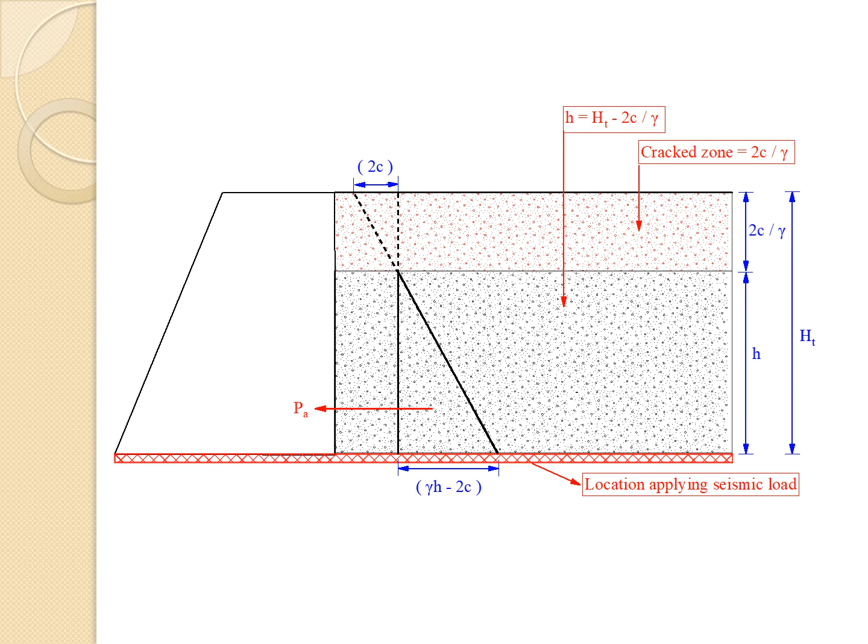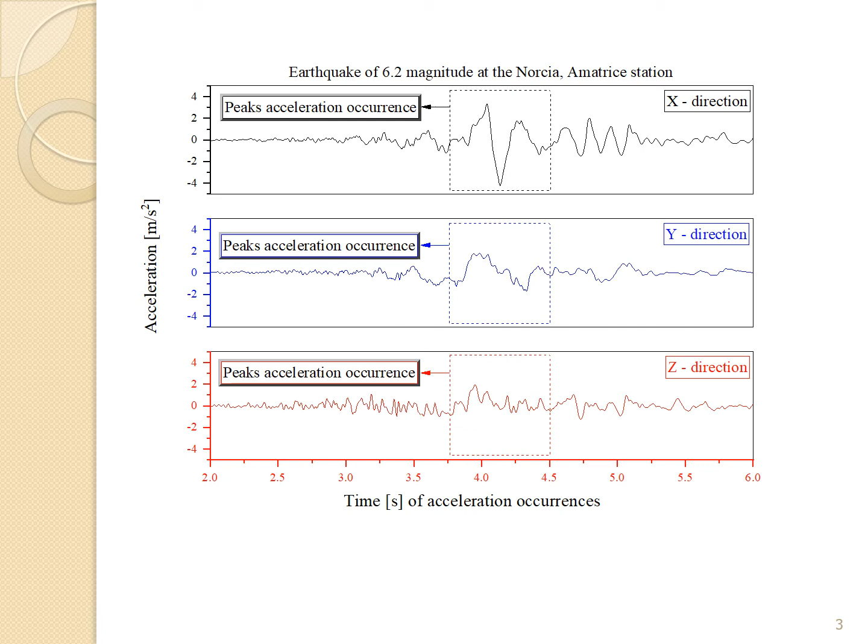The seismic load is applied here in X, Y, and Z directions simultaneously. Three important parts of the seismic load are selected based on peak acceleration occurrence. A magnitude 6.2 earthquake is used for this simulation and applied to the model.

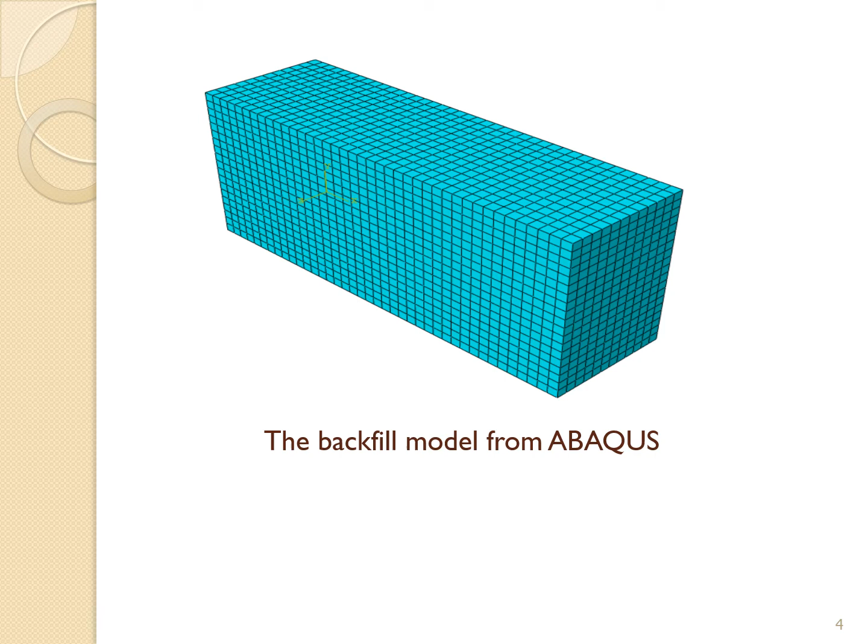Only the backfill model is shown here because the seismic load is applied on the backfill, and we use the analytical model to realize the crack. After realizing the crack, with help of Abaqus and nonlinear finite element method, I understand the displacement, which is very important in the seismic stability of an earth structure.

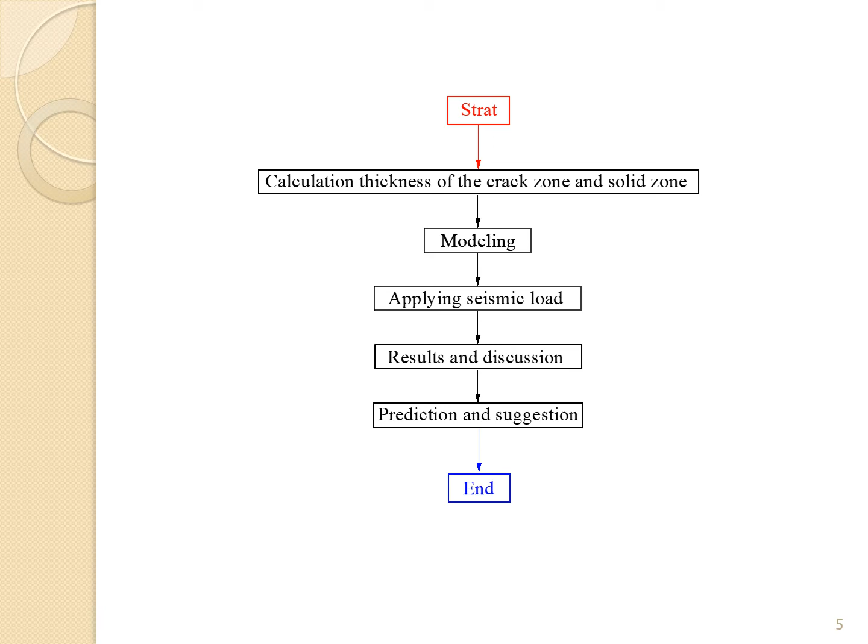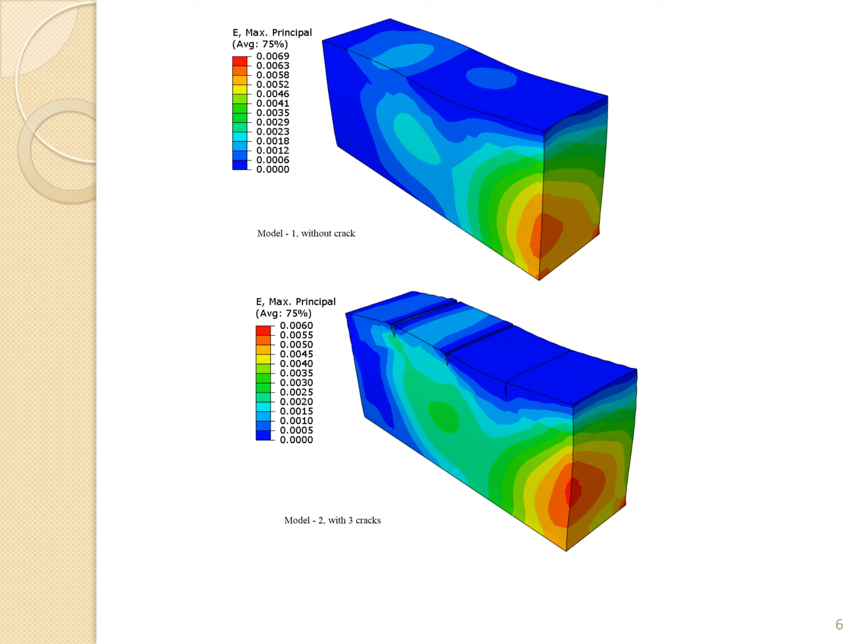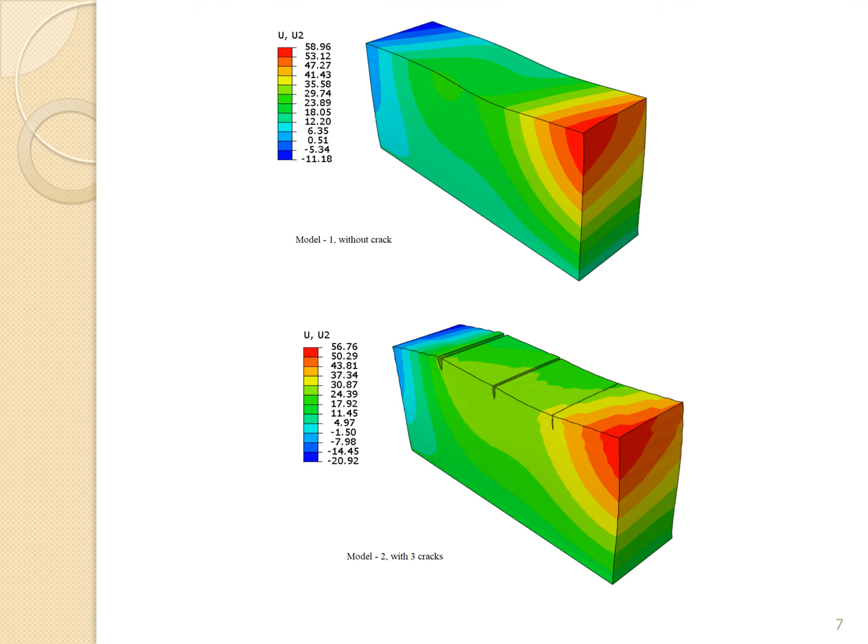In that part, the backfill without the crack has a displacement of minus 11, while in model 2 with the crack, displacement in the negative direction is around 21. What do we understand? After applying seismic load in model 2 with 3 cracks, we have higher total displacement from the positive and negative directions.

In reality, most clay soil has cracks when placed in the backfill. To have a real and correct design of the backfill and understand its seismic resistance, we need to understand displacement in the whole stage of the numerical simulation, not only one stage. Then we can understand the vibration mechanism of the model.

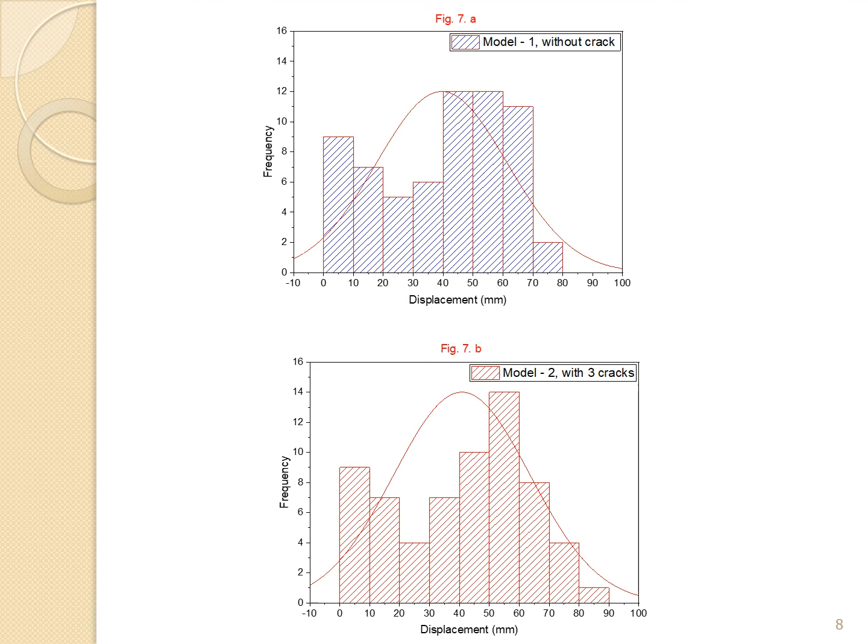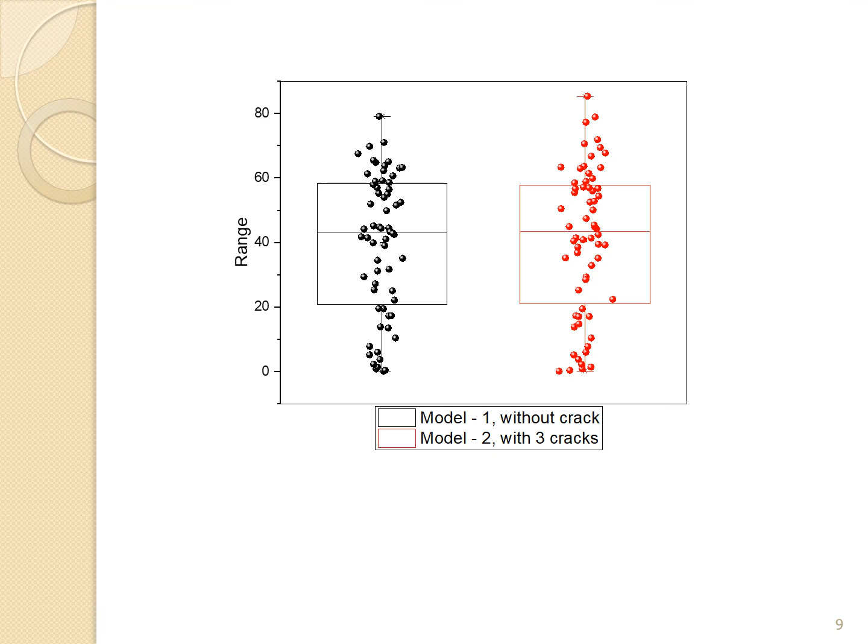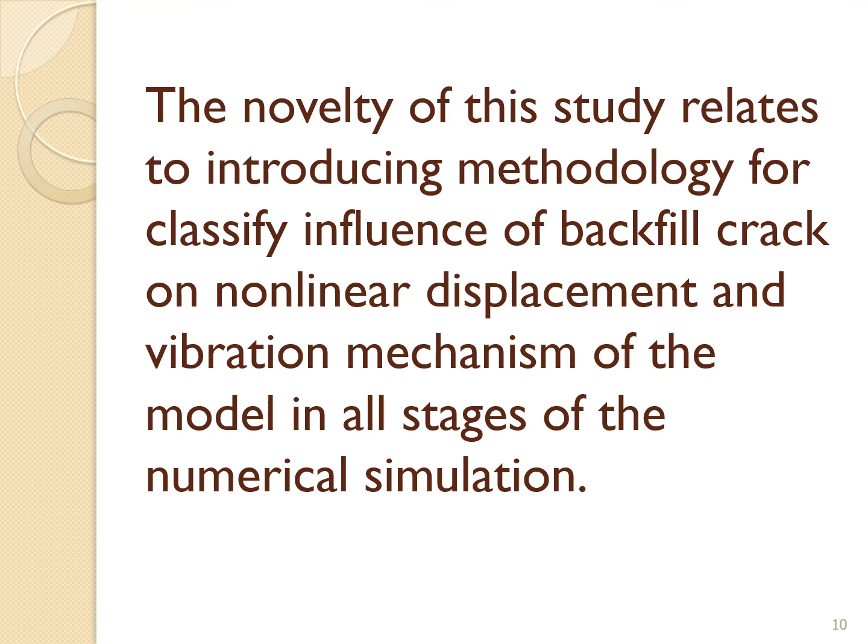The range of displacement is also shown here for the cracked model and the model without a crack. The novelty of this study is introducing a methodology to understand the crack in the backfill and its impact on displacement and the vibration mechanism. We have two types of displacement, linear and differential; differential displacement further accelerates expansion of the crack.